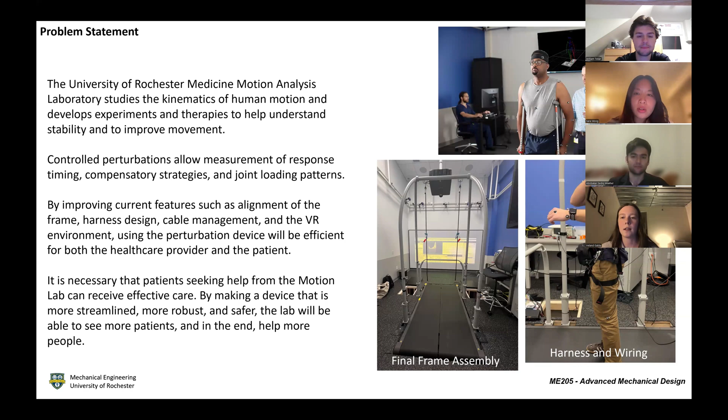At the end of the semester, the final deliverables we will be giving the Motion Lab include a functional prototype, a technical report with test data, and a theory of operations manual. To ensure the correct design and success of the project, certain requirements are defined in consultation with the customer. These include: mounting plates in the frame must be aligned, harness must fit the 5th to 95th percentile of male and female body types in the US and still be able to measure patients at the hip for the motion trackers. Packaging for load cell wires will be clean and will not interfere with tension of paracord.

Device must be able to disturb gait and catch a fall safely. Prototype must be designed robustly for continuous everyday use, and patients must be able to be pulled in the cardinal and ordinal directions. To design and build prototypes to meet these requirements, certain specifications were determined. These include designed and bulk items will have a factor of safety of at least 2.

Everything must maintain functionality when the treadmill is inclined to 9 degrees, which is the max angle it can go. The adjustment increments for the height adjustment of the pulleys will be no greater than 2 inches. The harness will allow for adjustment such that the angle of the patient's knee does not go past 90 degrees, and the frame will be able to be set up by no more than 2 able-bodied people.

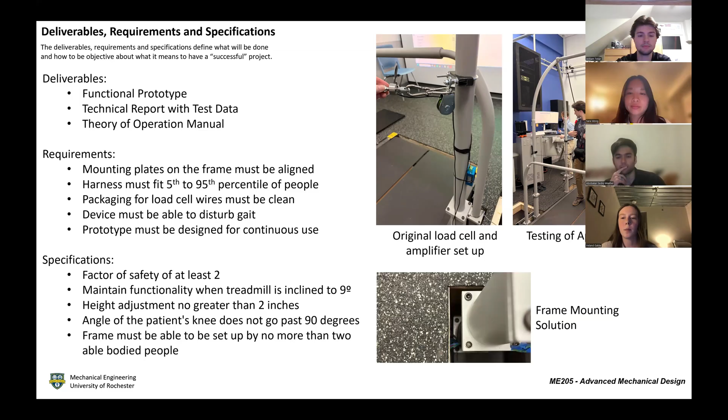As part of our functional prototype, we had to select a harness that met the requirements of the Motion Lab. And we did that via concept selection via the selection matrix seen in the top right. Each concept represents each team member's idea for the waist harness solution. After meeting with Zach, the motion engineer, and talking through all the ideas, the team decided to combine specific parts of several ideas to ensure the maximum safety and comfort of the patient.

Our final design is listed as idea 5 in the selection matrix and can be seen right here on the bottom of the slide. However, this idea ranked lower than or tied with some of the other ideas in the most important categories, including adjustable for all sizes, accessibility of amplifiers, time to implement, cost, and safety, but it still had the highest total and weighted total in the matrix and was the safest by far.

Combining the harness with the strap on the pouch allowed for the load cells, amplifiers, and NI device to be attached directly to the patient, which decreases the number of cords and wires that needed to be wired to the patient from outside the frame assembly.

Some of the harness criteria included the waist size ranges from the 5th to 95th percentile. It could still attach the paracord wire to the waist of the harness and could attach the load cell amplifiers to the harness and also could attach the safety cord to the harness.

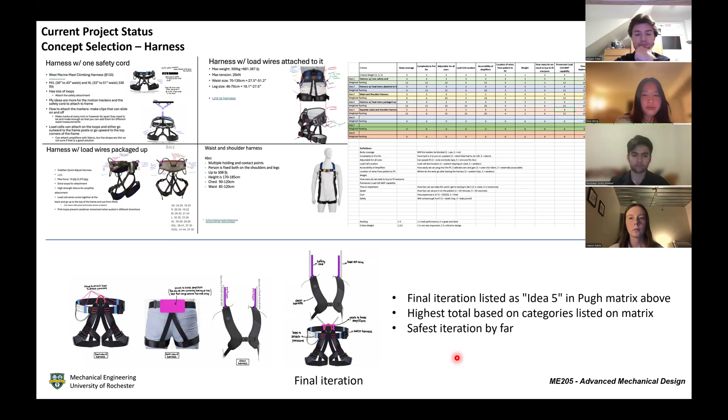The original frame did not align with the floor's permanent mounting posts, and this created a problem. Multiple designs, such as socket joints and clamps, or using a hollow mounting post, or using the existing frame and customizing it were proposed. And a selection matrix was used in order to find the best idea.

The winner was a suggestion from our Motion Lab engineer, Zach, and the idea was to use upward-facing bolts with cone-shaped tips to act as locators, and it outperformed other ideas in terms of speed, implementation, and safety. The existing bolts were modified and cut into the cone-shaped tips. The system is now fully implemented and includes floor covering to eliminate tripping hazards when the frame is removed.

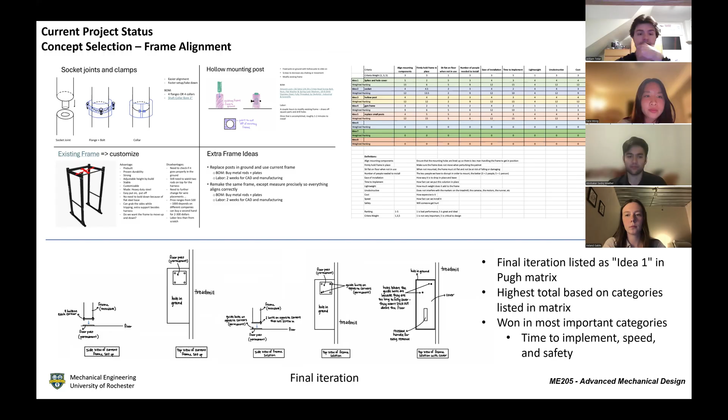All right, so for some further analysis, we did some tolerance and fatigue analyses, one with the 3D printed corner calibration marker plates and the other with the eye bolt connection with the load cells. We will get into exactly what these do in a little bit, but for the 3D printed marker plate, the purpose of this analysis is to determine how far the motion tracker calibration balls can deviate from their nominal position when they are in their respective pockets or pegs.

Because the pegs in the bottom here are a little smaller than the holes that they go into, there's a little wiggle room. They can either translate or they can rotate. And then in addition, you add that to the inside here. I can show up here where the bases of the calibration balls can also wiggle around in here just for clearance.

And you add those all up with the given plus minus 1 millimeter tolerance range from the Motion Lab. The worst case calculation is plus minus 0.789 millimeters. So this confirms that we are properly within our tolerance range.

Moving on to the fatigue analysis. I'm going to move our faces. We analyzed the pull between the load cell here, the threaded load cell, and then the eye bolt. And so the way we did that, a few key assumptions had to be made.

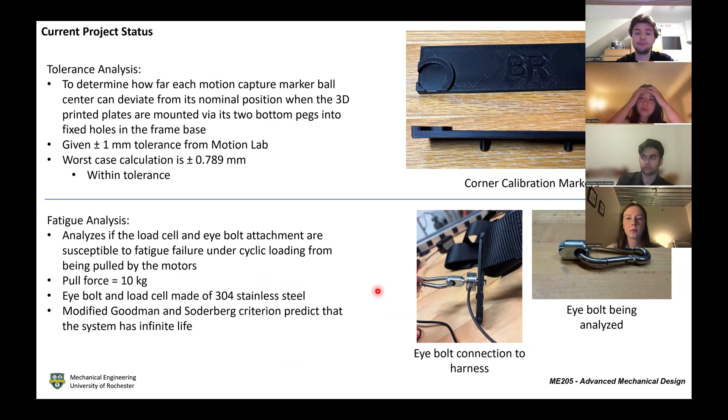Once we did that, we plugged it into the modified Goodman and Soderberg criterion, and both of these values were far less than 1, which indicates that the system will have an infinite life and that there is no failure point with the pulls. And something to note too is we assumed that the cycle count would be about 100,000. This was sort of an arbitrary estimate, but regardless, infinite life.

So we also conducted a fastener torque analysis and a statics analysis for our system. Verifying that bolted connections are torqued properly is critical to ensure safety in an assembly. So by finding the proper bolt torque for these connections, it's certain that the bolt will remain in place. For this, we analyzed quarter-20 inch bolts made of 304 stainless steel that are zinc coated. These bolts are located at the bottom of the frame to attach to the plywood so that for design day, the frame will remain in place on top of the plywood.

So using the equations in our lecture notes and in Shigley's, the proper bolt torque was calculated to be 2.98 pound-feet. For the statics analysis, to verify our factor of safety, we calculated the max force the safety cords and harness would be subjected to if a 95th percentile male were to fall in the system.

This analysis analyzed the maximum tension experienced by the two supporting ropes in the event of a fall. These calculations can be seen to the right. So based on these calculations, each rope must hold 1,250 pound force. And with that factor of safety, the ropes that we purchased can withstand 2,500 pounds force.

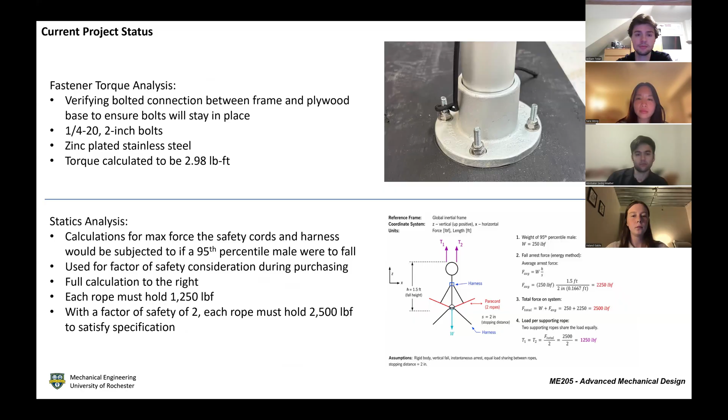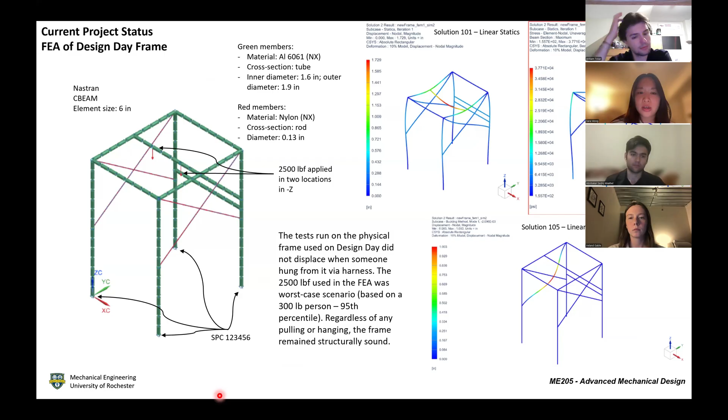Additionally, we used von Mises stress for this analysis since the material is ductile. And because the material is ductile, von Mises is the appropriate stress to evaluate. In terms of manufacturing the guide bolts and

Yeah, I think it's me. You skipped the... Did I skip? I don't think so. Oh, I meant go ahead.

Okay. All right. So here is some of our manufacturing. This is everything that we 3D printed. Starting it off with the corner calibration plates, which I already spoke of in the tolerance analysis. Here we have the very creatively named front right, back left, and this one is the front left, but the reason that there's sort of a hole cut out in the middle here is in the motion lab, there are two screws that we have tried our best to take off, and they don't sit flush with exactly where the plates go. And so we cut our losses and just basically went around. Doesn't change how it works, just a little different.

They're 5 by 1.13 by 0.145 inches, and this is accounted for vertically in the offset when you calibrate the tracker balls, and they're only 30% infill because they don't actually carry any stress, so they can be quite weak.

Next, we have the motor spools, and these attach the motor shaft and then wind the paracord, and they have a 14.1 millimeter internal diameter to fit around a 14 millimeter motor shaft, and a little key here was cut in the spool, and then a keyway was cut in the model, and then a key was placed in here to sort of lock it in. And then here we can see 3 holes put into one side to tie the end of the paracord, just a little quality of life and housekeeping upgrade.

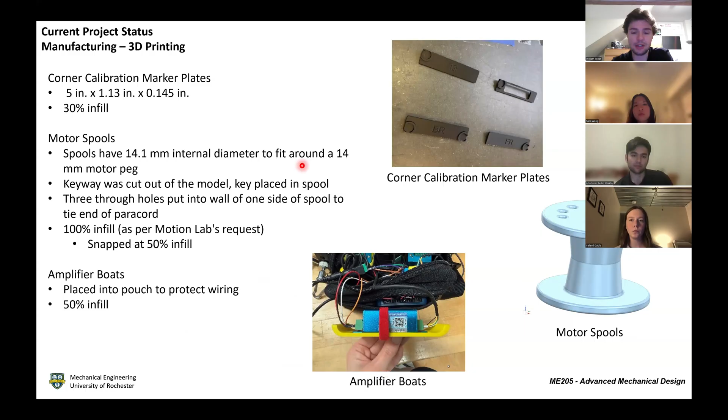So, in terms of manufacturing the guide bolts, they were the team's solution to the frame alignment issues. These bolts would allow the frame to be mounted and bolted with less effort. To make the guide bolts, 1/4 inch bolts were modified so that the holes in the frame could easily slide onto the bolts.

Using the belt sander, about a 1/4 inch of the bolt length was shaped into a cone. The result was a bolt with the point at the threaded end, and this would help the frame slide easily into its place. Only 2 out of the 4 holes on each mounting plate had guide bolts. The other 2 were used to bolt the frame down.

Additionally, floor coverings were manufactured to prevent anyone in the space from stepping directly onto the exposed bolts and injuring themselves. The holes in the floor and the spiked guide bolts created a hazard for everyone in the space. The solution to this was to create floor covers out of plywood. The holes were measured, and the plywood was cut accordingly to fit the hole.

The table saw was used to cut the plywood into the required shape, and holes were cut into the floor covers to fit the guide bolts. A handheld drill was used with a 1/2 inch bit in order to create these holes.

The rectangular hole in the middle of the floor cover is used as a handle to pick up the covers when the frame needs to be set in place or taken off. A handheld drill was used to make the holes where the 4 corners of the rectangle would be, and then a handheld jigsaw was used to cut out the rest of the rectangle.

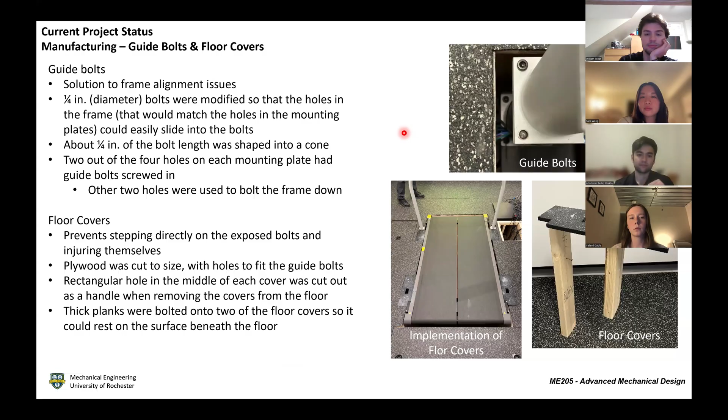So we also had to deal with some cable management and organization in order to deliver an even higher quality functional prototype to the Motion Lab. We have this pouch that connects to the waist harness, in which the amplifiers, the breadboard, and the excess load cell wiring will be housed.

That's in the main pocket of the pouch, and then in a side pocket, the NI data acquisition device will just rest there. We also had some color coding of the wires, so it's clear which wires go to which amplifier and load cell. We were also able to replace some unnecessary banana cables with a soldered breadboard.

We were also able to extend a wire of the 10-volt power supply so that it could reach the harness while being plugged into the wall. Additionally, we put grommets into the pouch, which allow the wiring to pass in and out without having to open the zipper. We also put grommets into the front and main pouch so that the wires could reach the NI data acquisition device.

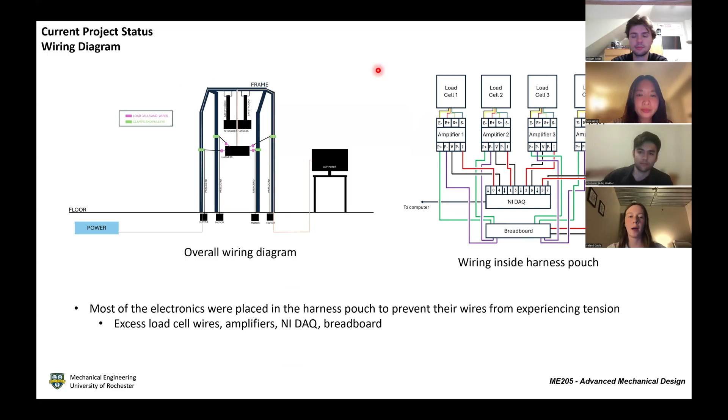So here we have our design day frame. We were unfortunately unable to use the frame from the Motion Lab, so the best option we had was to build our own. We used extra aluminum tubing from the Motion Lab, which they used to hook up their motion tracking cameras. The frame is 3 feet by 4 feet by 7 feet tall. As you can see here, we have T-joints and 4-way joints that connect everything up, also provided by the Motion Lab.

Originally, as was spoken about a little earlier, these 2-foot tubes that summed together to get the 4-foot tubes were cut into two. There was a little problem with buckling. When we would pull down on the main support, we experienced a little bending. So what we ended up doing was using extra aluminum tubing, and we just cut 2 4-foot tubes, and then problem solved.

And so the frame is bolted to a 5-foot by 4-foot sheet of plywood painted black, just so it looks nice. And then there's a rubber mat, it's kind of hard to tell, under the plywood, just one to protect the floor of the GAC where we're presenting, and so it doesn't slide around.

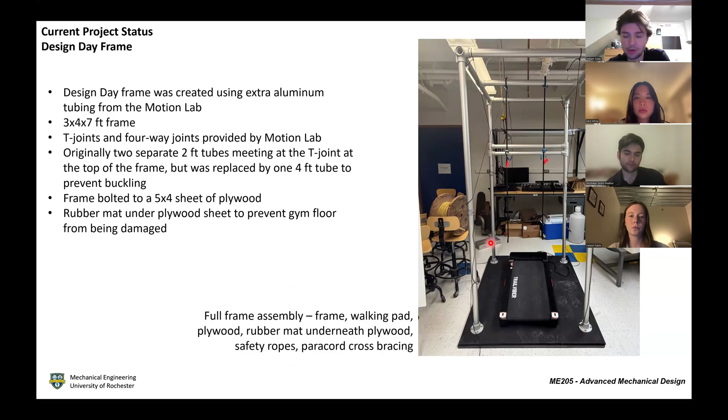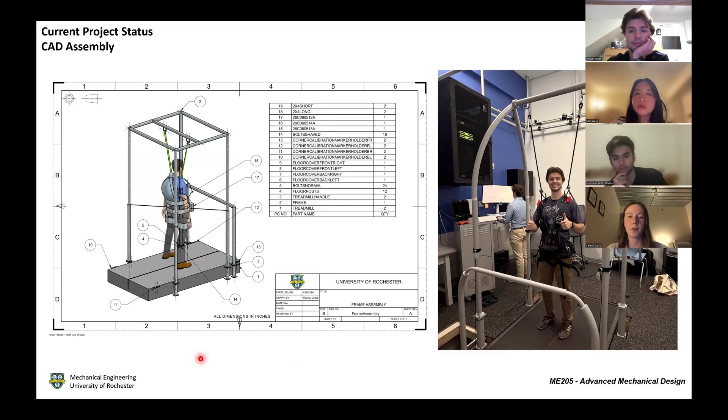So here is just our final CAD model and drawing that shows the whole system, and then also the real life version we took during our testing of all of our devices.

In terms of the testing of specifications, the specifications were determined by consulting the sponsors as well as the professor, and they were agreed upon at the beginning of the semester. And all designed and manufactured components in direct contact with the patients were required to have a factor of safety of at least 2. And other specifications included the device to have functionality when the treadmill is inclined to 9 degrees, because that's the maximum angle that the treadmill can tilt.

And the height variability for adjusting the clamps on the frame must be adjustable in increments of 2 inches or less. And also, it was required that the system will allow for adjustments so the angle of a patient's knee is not less than 90 degrees if they fall during perturbation. And finally, the frame must be able to be set up by no more than 2 able-bodied people.

And all these specifications were tested by connecting a team member to the entire completed system at the Motion Lab. And the system was also tested, and the requirements and specifications were verified in the presence of a representative of the Motion Lab.

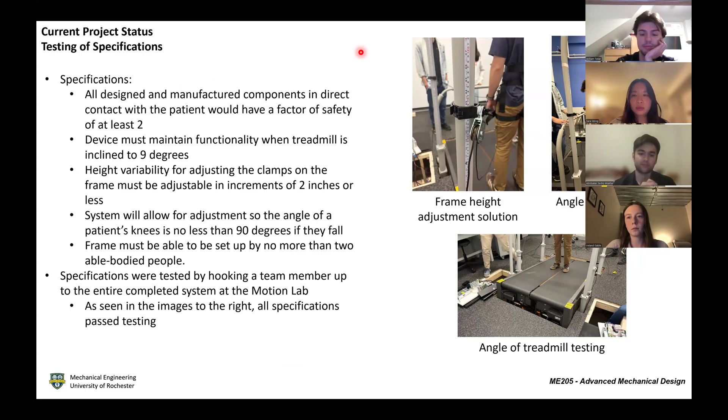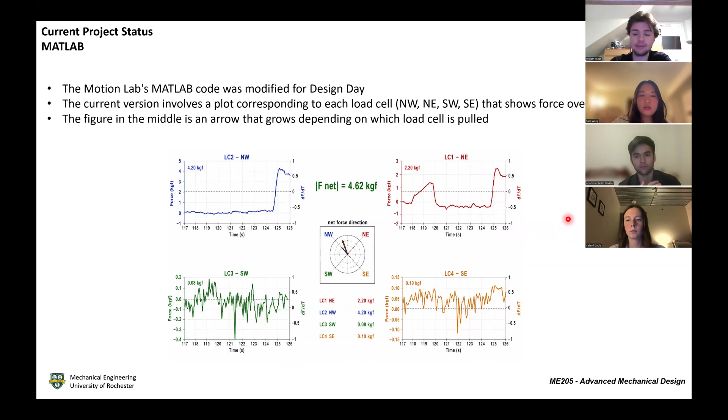Given more time, we could have done a little bit more with the VR. We could have helped the Motion Lab further immerse their patients by providing an environment with obstacles in VR that could track the patient's full body movement in addition to their hands, which they already have done. Maybe we could do something with their feet.

And then in terms of design day, we could have implemented the motion trackers as well if we had time, and if they let us have access to their VR or their motion tracking cameras too, we could have done this. Additionally, we could have come up with a more efficient solution for the frame alignment. Currently, the guide bolt solution works just fine, but it still does take at least like 5 minutes with a couple people. So there could be ways to improve that.

And then we would also like to improve the cable management within the pouch. Although the color coding does help, due to the size of the pouch, the wires are packed in pretty tight, so we would definitely improve on the packaging within that pouch.

And finally, we would like to acknowledge the Motion Lab, including Zach Farnham, Dr. Ram Haddas, and Dr. Wood, and Brian Morey. And then we would also like to acknowledge the Mechanical Engineering Department at the University of Rochester, including our professor, Christopher Muir, Jim Elkins, Chris Pratt, Sam Kriegsman, and our TA, Liz Martin.